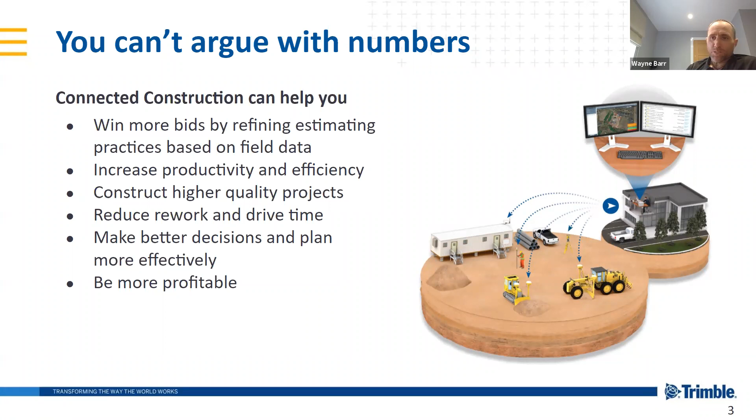Okay, great. Thank you, Wayne. Sorry, Seth. Not at all.

So at Trimble, this is how we've modeled our connected construction phase. We started with feasibility and planning, and you can see all these various steps that get to owner acceptance and the final sign off. What's in red here is what we're really focused on in today's conversation: the execute phase, where the work actually happens, and the real-time productivity updates. I came out of the field as a field engineer, I love being in the dirt, and that's where a lot of the work happens.

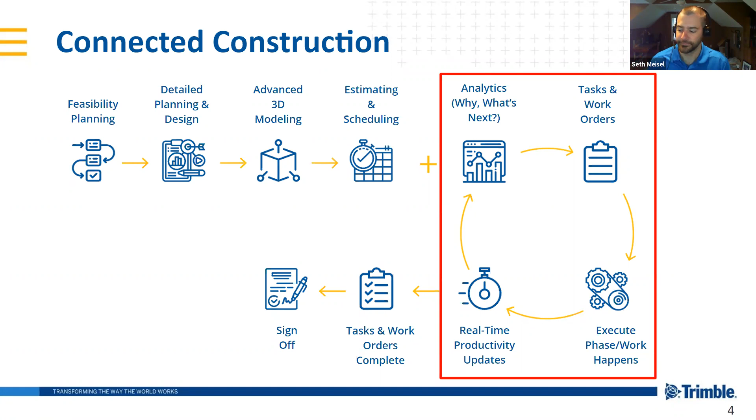Great, thank you, Seth. Mm-hmm. Okay.

So just summarizing - that's actually a pretty good segue into this next slide. Thanks for asking that question, Matthew.

So we start with that model creation, and then we have tools that allow the superintendents and the foreman to manage the various designs. We can always tell through WorksOS who's on the latest and greatest design and what phase of that design, so you can always tell what your operator is guiding to and cutting to, and if it's the correct model or not.

Then we go into monitoring. We have things like our remote operator view inside of our technicians tool, so you can see the operator's screen on a connected machine from wherever you are. If you're the superintendent and you had to run out, you can pull this up on your phone, as long as there's a connection there.

And then, like I just spoke to, we're capturing that elevation data in the northings, eastings, and elevations from whatever attachment tip or track mapping, and we can update and sync that surface model in the background, and then draw it back down to the machines. Everybody can update their map and see what they've prosecuted throughout the day, what they have yet to complete, or where they are inside of the goal that was set for the week.

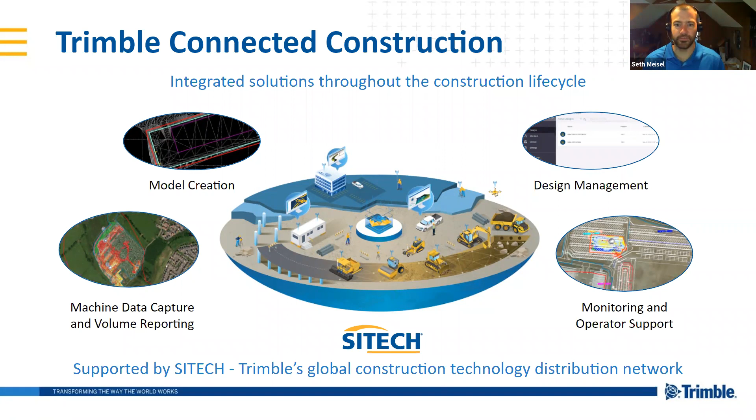So with that, we've touched on a lot of generalities, and I'm going to hand it over to Wayne, and he's going to talk about some real life examples here and get into the dirt.

Thanks, Seth. This Jackton project, which we are currently working on - we spent a good year and a half working on the development and getting this to actually construction stage with our client. With this project, we were able to actually offer up a couple of our specialist solutions for foundations, including a solution for an embankment foundation where we no longer had to dig out 7,500 cube and replace it with imported aggregates.

We were actually able to use a grout injected system and mix the existing soils with the grout to make a cementatious finish, and then beyond that we're going to build a 4.5-5 meter wall on top of it. As part of our geotech team, we've come up with these solutions, and with the help of the technology we've got available, we're able to deliver quite a large project in a very short amount of time using our specialist techniques.

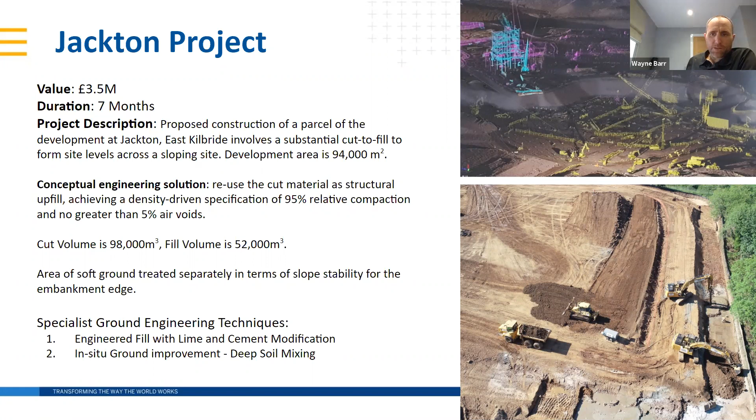So Seth touched on the TBC. TBC is such an important part of our business because it's where we generate surface models for all the equipment and machines. We take the information provided by the clients and turn it into surface models. These surface models are then used for various things - we use them for quantification for the project to get volume at tender stage, and then we use the same surfaces for exporting via Works Manager out to the equipment on site.

For the guys to actually have the most up-to-date and correct data available for their operations. We're also extracting some of the data from site, from the machines, back into TBC to do some volume analysis. And we're using some of these surface models for validation reports, which we'll talk about in a couple more slides' time.

Can I just ask you, Wayne, before we go on to the next slide - obviously each project will be different, so there's not always one set answer, but how often would the models be updated - on a daily basis, or more frequent than that, or less frequent? What tends to be the norm?

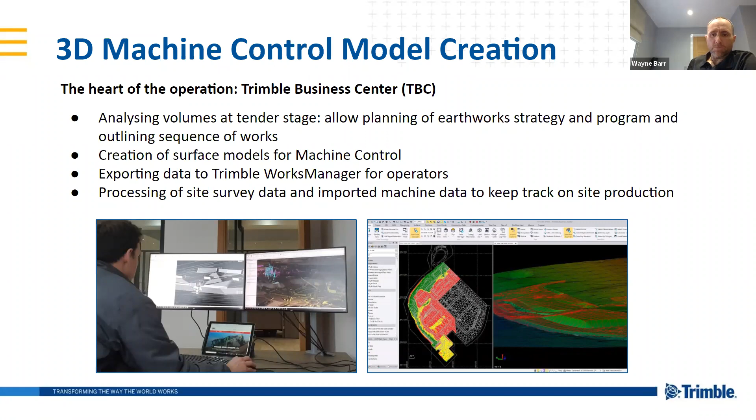So this is a 3D model we've created in TBC. This is quite important to us to actually see the site and how it's going to look, hopefully when we've completed the works, but it also gives us an opportunity to see if it's machine control friendly. We want to make sure the guys on site are actually going to be able to use the equipment to the best of their ability by not putting in areas which are quite difficult to construct.

Then we can go and look at how we're actually going to build the site and what's the best way for our site team to deliver this project. If there's a large amount of cut to where the fill needs to go, we want to work on the shortest haul distances, but we also want to be able to build this in the front left-hand corner of the site - that's an earth embankment up to 5 meters high.

So obviously there needs to be a certain way in which that's constructed, so it actually passes validation for the site. That alone has been quite a big job for the guys on site, to form that and shape it to the final design. So by looking at the 3D models beforehand and speaking with the guys on site about how we're going to build this, it gives us good insight on how we're actually going to deliver projects.

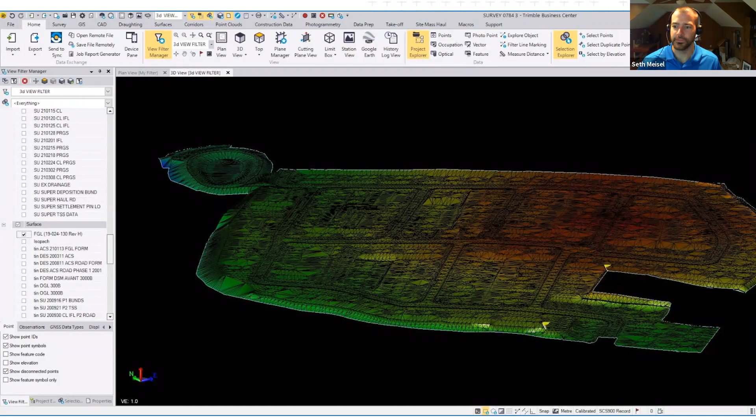Yeah, well, on this job we had to build a haul road. This site's got an excess of material, and if you look in the top corner there's a SUDS pond - and would you believe the client wants a haul road right next to it? So just two days ago I was able to take this 3D model and show them where this haul road was going to tie into the corner of the site. We were able to highlight there's a 4-meter elevation difference between where their haul road is and where this site's going to be finished to, but they still want this haul road accessible for removing the excess cut-off material. Beyond that, we've now got a site instruction to do another 1,000 cube of filling to tie the existing levels in to what these levels are going to be. So that's really handy to have, and really important, because until you've built it you wouldn't be able to see there's a potential problem there.

And then I've just got another question from the audience, from Aditya Sharma, who asks, how do you collect the data of the site? And then just a bit more information about how much information there might be about the depth of particular locations.

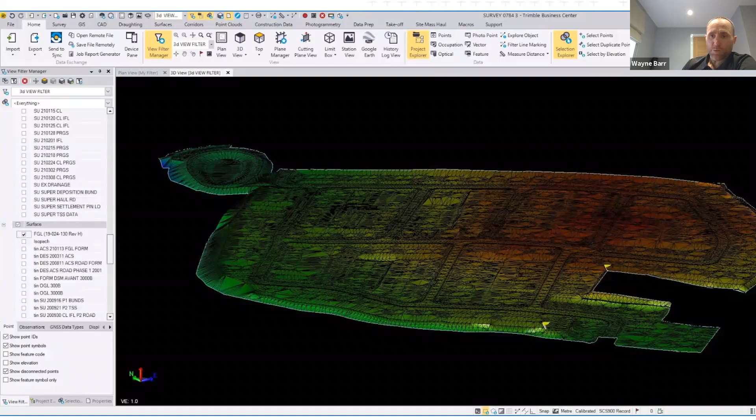As Seth mentioned earlier, the machines themselves actually record data depending on whether it's set up for the blade or the tip of a bucket. So at the moment all our excavators are set to record the lowest elevation. As the excavators are excavating to the lowest point at any given area, that's the data we're recording. So at the end of a day or a week, we're able to export a surface model from that specific machine and bring it back into TBC as a surface model, which we'll talk about in one of the upcoming slides - how we're utilizing that information as part of a validation report. Great, thanks Wayne.

Design management - this is again where we're talking about sending a lot of our information through Works Manager. We brought Works Manager on last July, and now all data transfers from office to site go via Works Manager.

We can now look at Works Manager and ensure all our machines are working to the latest design available. We can archive previous designs, so guys on the machines can't access designs that are no longer applicable. This has been such an important part, because in the past we've had machine operators working to wrong designs for days and weeks, which meant we had to go back and rework areas, at quite a large cost to the business. So Trimble Works Manager is something we monitor every single day on all of our sites, just to ensure the guys are working to the right data.

And through the system we're actually able to download some data back from site. We can download our survey equipment - once we sync it back to Works Manager, we can take all the information from the T7s and process that back in the office before our surveyors even had a chance to send the data back via email or through our cloud-based system. So it's a fantastic tool for us on the sites.

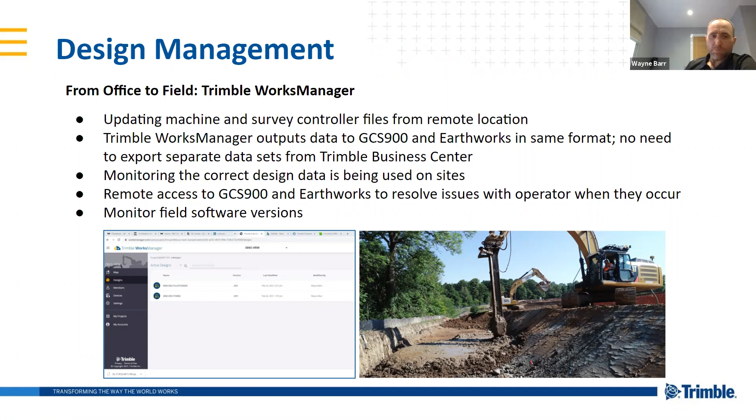We were adding a cement binder into the material, and every hour I was monitoring the volumes they had within this specific area to ensure we didn't over-engineer too much material, which would have cost us several £1000s. So I was able to get to pretty much 50 cube over the required fill amount and bring the guys on site and tell them that's enough.

At the end of the shift, they ended up with 30 cube too much material, which at that point was fantastic, because in the past we probably would have mixed a couple hundred cube too much just to be sure. So that was a site we were monitoring hour by hour until we got the right amount of volume.

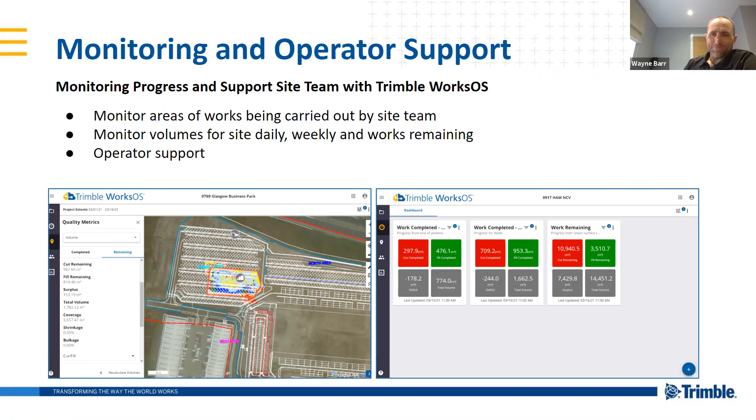It actually gave us a really good insight into the actual volume we mixed for the project. We were able to check back on what we thought we were going to mix versus what we did mix, and it was quite fortunate - we were on the better side of the volumes on this occasion. This is 5 meters in the ground; you can't get an engineer to check those volumes or surfaces, but this piece of equipment is recording that surface below the surface. So it's a fantastic tool for that - it's been really great.

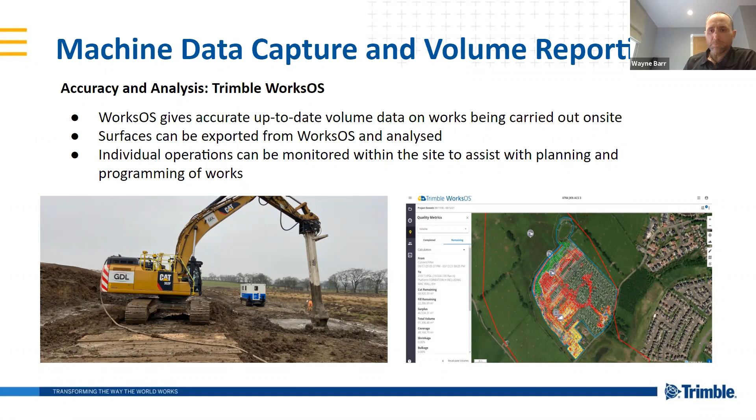Awesome. So it's so good to hear things like that.

Really encouraging. So to summarize everything, bringing it full circle - the analytics, the tasks, the execute, and then leveraging the data during the execute phase and repeating this cycle. We've talked about the initial Trimble design in Trimble Business Center and how that can be leveraged, and Wayne has explained how he does that daily, giving guys hourly updates, even down to that time frame. We can get those designs down to the machines very quickly through WorksOS and Works Manager, and that gives the operator real-time information to leverage in the field and pivot and adjust as differences arise or unforeseen site conditions arise. That information is then consumed by the machine and pushed back into the cloud and can be leveraged in Business Center, and that cycle starts all over again.

I think for all of us, that cycle is the life, the heartbeat of an active construction project day in and day out. And when we have our finger on that pulse, it's really encouraging to know where you are, when you're there, and just how much you have left to go.